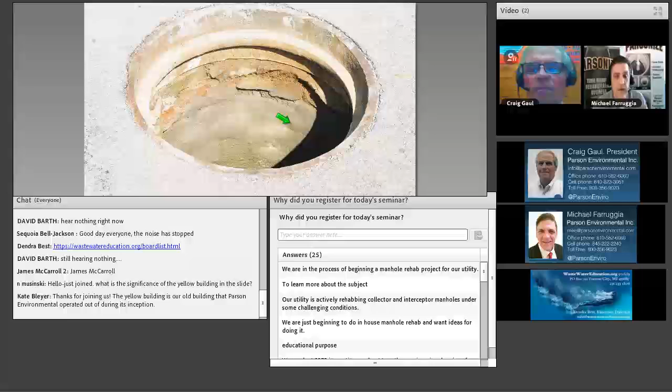Now this next picture shows brick manholes. Now these brick manholes, as you can see, they've been here for quite some time, and they've lasted a long time. Now, you can see they're in need of structural rehabilitation and definitely got to fix some loose bricks to stop I&I. So in this case, we recommended only a cement relining, allowing more structures to be rehabbed.

These pictures actually came from a job at the West Point Military Academy, where originally the Army Corps of Engineers wanted to use our composite system. And that's where the cementitious product is applied in the first phase to structurally rehabilitate the integrity of the structure, and then the epoxy is applied in the second phase to resist corrosion, and then they cure together, making the system composite.

After a few meetings with us, they quickly realized that their system had a lot of age deterioration and that they could eliminate that epoxy phase, which was more than 50% of the cost of the project, and then they were allowed to rehabilitate more than twice as many manholes using our fiber reinforced microsilica enhanced cement. So it worked out really well for them, reaching out to us and contacting us prior to actually starting their project.

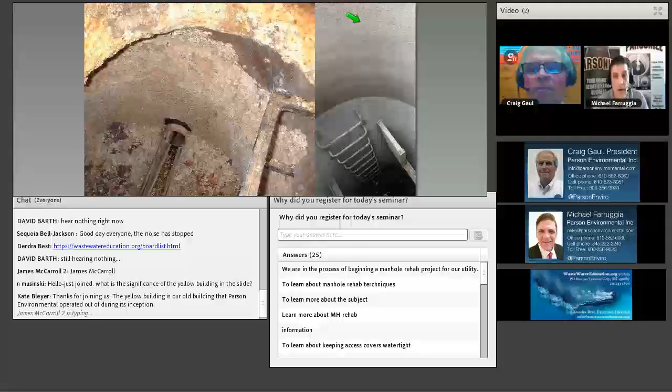These next pictures here show a bunch of deterioration, and you can kind of see over here that's really extreme, and on this one here it's not as extreme, but it's definitely starting to deteriorate. Okay, there's a lot of debate out there on whether this type of corrosion is caused by the H2S gas or sulfuric acid produced by microbes, which I mentioned earlier, which is known as microbial-induced corrosion deterioration.

So what is MIC? It's a bacteria on the surface of the sewer structures. It's a sulfur oxidizing bacteria known as Thiobacillus thiooxidans that consumes the H2S gas that is in all waste streams, and it discharges or excretes a sulfuric acid, H2SO4, which destroys all concrete and metal and just about anything it comes in contact with. Now, I understand that's a pretty simplistic explanation, and there definitely is a lot of research out there on MIC, so you can go ahead and look it up and you'll learn more about this cycle.

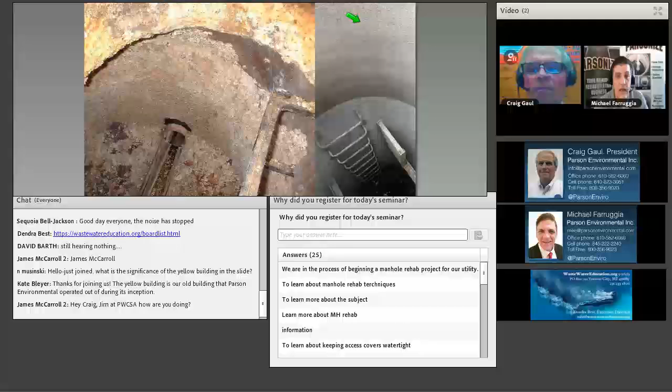But the real takeaway here is if MIC is present, address those microbes. If you just reline the structure with cement, the microbes will begin to attack that new lining. So what we would recommend doing is to reline it with an epoxy coating after a minimum of a half-inch cement relining is applied, even if that manhole structure is not compromised. This is done to stabilize the surface, to actually stop that MIC cycle, and it also smooths and profiles the surface for better adhesion of the epoxy coating.

If you're not going to include an epoxy, at least use an additive that fights MIC, and Craig will talk about that additive a little bit later, or a calcium aluminate-based product where the calcium aluminate, by its chemistry, fights against the MIC. Now, I've also seen many specs out there where the MIC deterioration is extreme and they require the MIC additive into the cementitious product, whether it's Portland-based or calcium aluminate-based, and then they also require a coating of the epoxy.

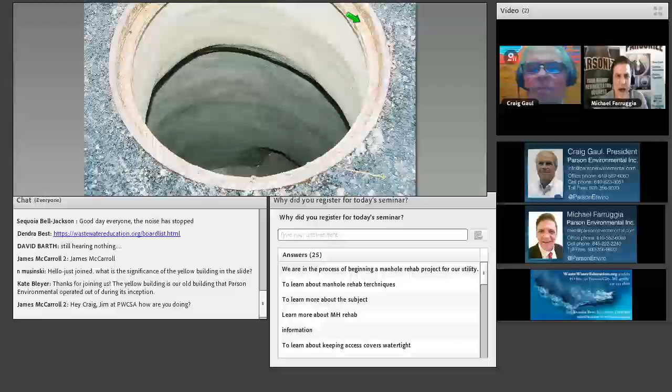So now the next question I always get a lot is how? How do we find out what's wrong with our system? Well, basically some form of evaluation or asset management survey does this. Now that could be a big buck survey done by an engineering firm or simply a foreman in your department visually inspecting and identifying repairs. But they have to have an end goal.

And that is, is the structure in need of rehab? Are we looking to control I&I like you see here in this picture? There's a lot of water over top of that. Or are you looking to stop further corrosion? A lot of times it's a combination of these issues that are identified during that evaluation.

Now, a real good example of this is during an inspection, it's found that the manhole itself is in great shape. But during rain events, and you're seeing a lot of situations here pop across the screen, the rain events lead to a lot of excessive inflow, either through the pick holes or through the top cover. Then there's a simple, cost-effective solution, and that would be to install manhole inserts.

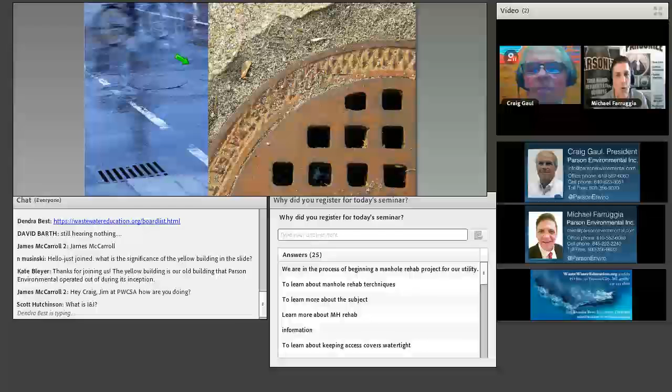And in this next picture, you can see it's basically just put right onto the frame flange, and then the cover's reinstalled on it. So for an investment of less than $50 per manhole and the simple labor to install that insert, you can get a huge return on a little bit of an investment.

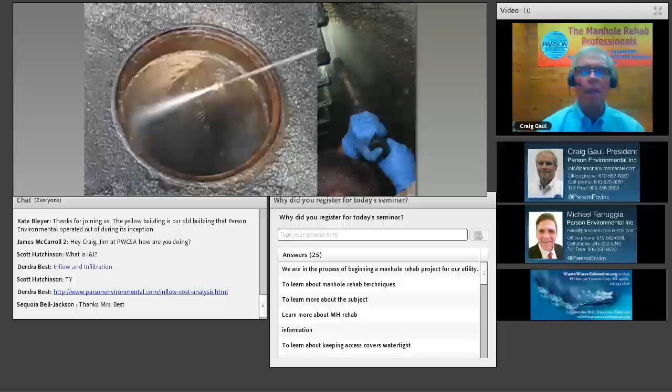So after we've got the manhole cleaned, we're going to look at infiltration points, because all those have to be stopped prior to applying a coating, because anywhere there's infiltration, no matter how small it might be, it's not going to allow the lining or coating to bond to the manhole in that area. So there's several different ways you can do that. This is a picture showing a hydraulic cement that mixes with water. You can do that basically at the job site. It sets up in about 1 minute.

Now, this kind of material is not typically recommended for a large volume leak, 30, 40, 50 gallons a minute. That volume will not allow that material enough time to set. Now, you could slow down the flow of that 30 or 40 gallons a minute with oakum or something else, and you might get away with it. But as Mike said earlier, not every product is capable of dealing with every problem. So that's why we have more than one infiltration repair product. So moving up the line, we get to grouts, urethane grouts.

This particular picture is our Seal-Tight grout. It's a 2-component urethane. It starts reacting in about 7 seconds, and it is good for about 50 gallons a minute. This is very serious stuff. When you start injecting it, you need to inject the entire tube set into the manhole. And to prepare the surface, you need to drill a hole through the manhole to the outside, because the way this material expands, there's not going to be enough room in the small hole to take care of all that material. So you want to basically stop the leak from the outside of the manhole.

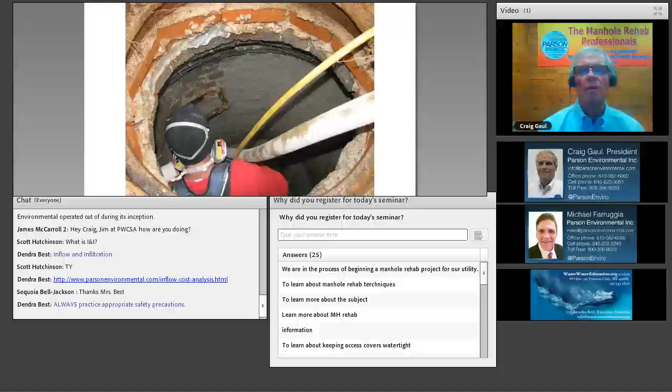It can be applied up to 3 inches thick, and it can either be applied by a spin caster, which you just saw, or a kind of shotcrete gun type setup. It is a wet applied material. The next level would be a cementitious product that uses calcium aluminate cement versus Portland cement. They look the same, they act the same for the most part, but a calcium aluminate by nature will provide a little bit higher level of corrosion protection.

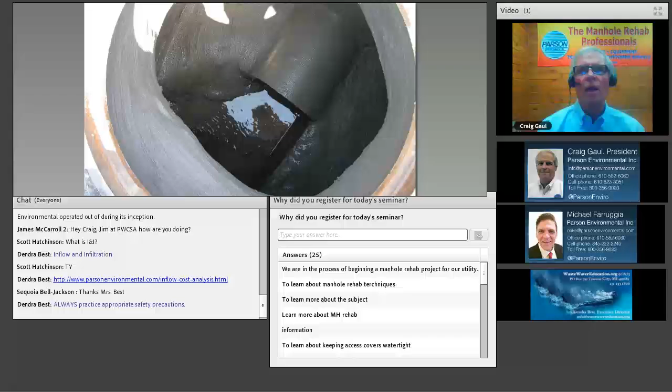Beyond that, we go to a calcium aluminate material that uses a calcium aluminate aggregate, which fortifies it even further. So you can see we're just stepping up the level of corrosion protection that we're trying to establish here. The newest product on the line, and there's a few companies that have them now, is called a geopolymer material. It looks just like a cement product. It acts like a cement product. It smells like a cement product.

But actually, the main ingredient, which in the MH Liner's case is Portland cement, is replaced with fly ash. And it's been found that fly ash really provides some great corrosion protection, because it takes the cement matrix out of that complete formula, and the cement is what gets attacked by hydrogen sulfide and MIC corrosion.

So speaking of MIC corrosion, as Mike had mentioned earlier, we do have an additive for that we can put with either our Portland cement product, which is the MH Liner, or the calcium aluminate product, which is called CA Liner 100. The dosage is about 6 ounces per bag. And again, when it's applied, it looks the same as it looked when there was just water.

So what we recommend is, if you're going to do a cementitious lining or an epoxy coating, it doesn't really matter, just take that up to the underside of the frame, make your repairs with the patching material to fill in any gaps, and then we have 2 products that you can use to create a joint or a bond between the manhole frame and the manhole structure itself. The picture you're seeing now is a product called Parson Epoxy FP. Comes in a kit form. It's easy to mix, easy to apply, can be put on with a brush or gloved hand.

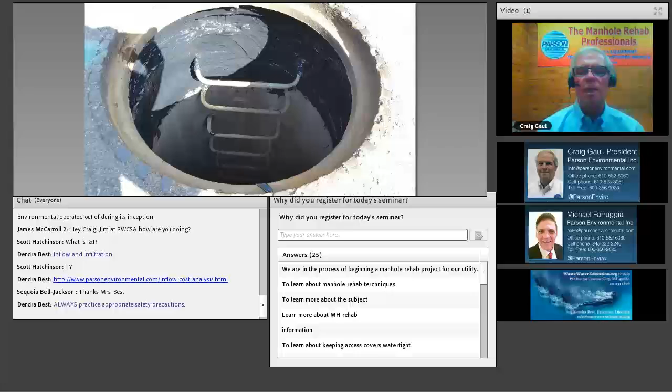Beyond that, we can get into an EPDM rubber sleeve with stainless steel bands that hold it in place. Obviously, you can see the ribbing on the EPDM rubber. It makes it very flexible, able to move around, which is very important again for this part of the manhole, because you're not only taking on impact, but you're also dealing with freeze-thaw situations in colder areas.

And you can see the installation equipment for the flex rib seal. The left side is a manual tool, and on the right side is a hydraulic powered pump that will spread the bands until they're tight. And you can see the buckets of the FP as well.

So after we've got all that taken care of, we got the cleaning done, we've stopped the infiltration, we patched our areas, we've decided on a lining or coating, we put the chimney seal in, and now we're going to take a look at the invert. Inverts are done on occasion. It's not a regular occurrence. My advice is, if there's not a problem with it, leave it alone, because you're going to end up having to bypass the manhole flow.

Now you can do this from inside the manhole with a flow-through plug and a corrugated pipe. It makes it a little bit easier, but at the end of the day, you are still bypassing the manhole. So you're still going to be restricting the flow somewhat. And there's a risk involved with that, as we all know. So again, if there's not a big problem with it, I would take the lining or coating material to the edge of the bench and call that good.

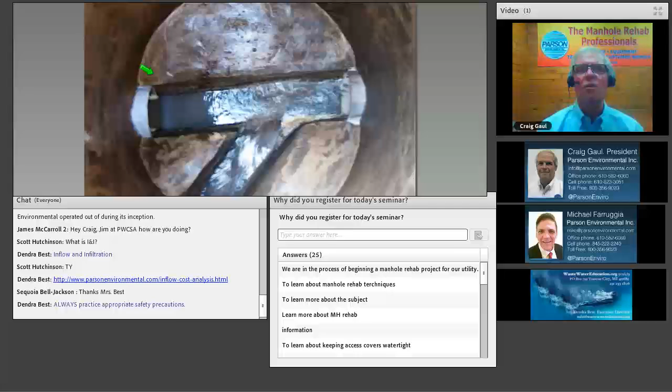So at the very top of the manhole, the last thing you would want to do is install manhole inserts. Mike had talked earlier about the cost benefits of installing inserts. And yes, they are relatively inexpensive for what they can do. The insert was developed because there were a lot of inflow problems that weren't being corrected and couldn't be corrected with manhole rehab. Very simple. You're not addressing that part of the manhole. So you were getting some benefit from doing the rehab, but not as much as you could get if you installed the insert as well.

So with or without pick holes, an insert can keep out 30 to 50 gallons of water per minute with 1 inch of water either ponding or flowing over it. Now, back in 1986, I had a meeting with an engineer locally, and he was a proponent of inflow and infiltration correction. He was aware of our product, we talked about it, and he decided to do a trial. So he took 10 inserts and placed them in a township that was about 26 square miles in area, at all different parts of the township. And he put 2 of them purposely in areas where he was pretty sure that there would be no inflow problems.